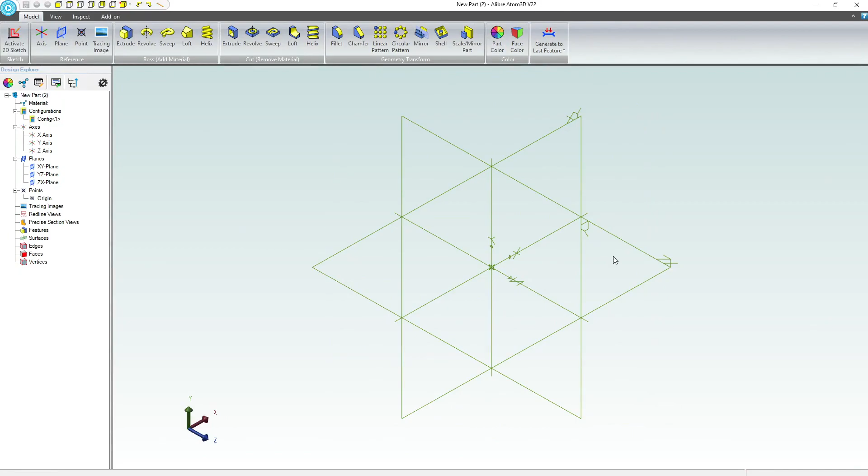We're going to go to a new part. And jumping in here, let's start on our top view plane. That would be our ZX plane here. And in our 2D sketch, I'll grab a circle. Let's do another circle, and another circle that I placed right on top of there. I'll right-click here and say Convert to Reference, and then we'll add in a diameter dimension. Let's go with, not 5 rather, but how about 6?

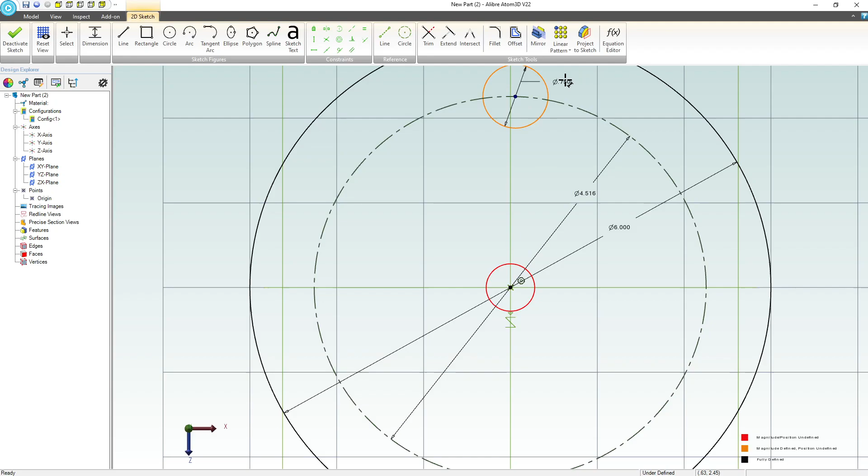And then we'll come across here and add in 114.7 millimeter, which I think is exactly, not quite 4.516. But I think that's a pretty common bolt circle diameter if I recall. We're going to say 0.75 here. Let's go with vertical relation, making sure that we're vertical. And we're fully defined there. I think I've got one more dimension to go. I think I'm auto-saving here. There we go. So let's go with 2.

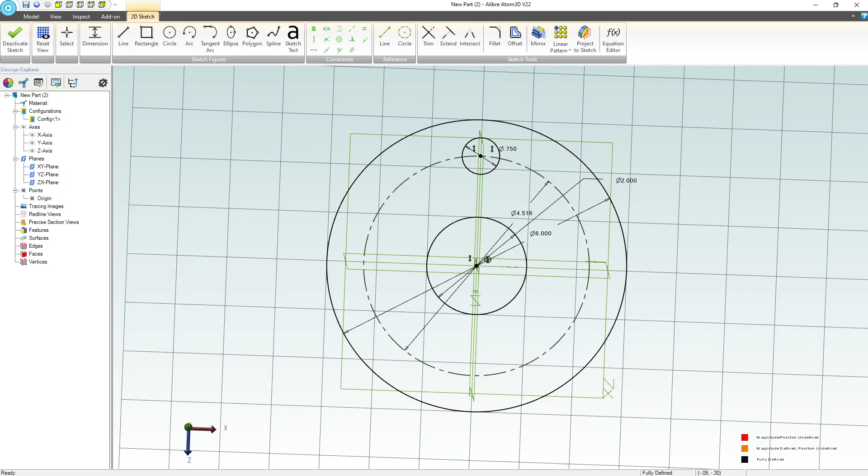Now, are we good here? I think we're looking about right. Next, we'll deactivate and extrude. We're going to go to 0.5. And you know what? There's one thing I did forget, actually. I need to actually propagate or pattern these holes, right? So we're going to do a circular pattern here. 5 instances. Our center will be here. And we want to choose an instance pattern.

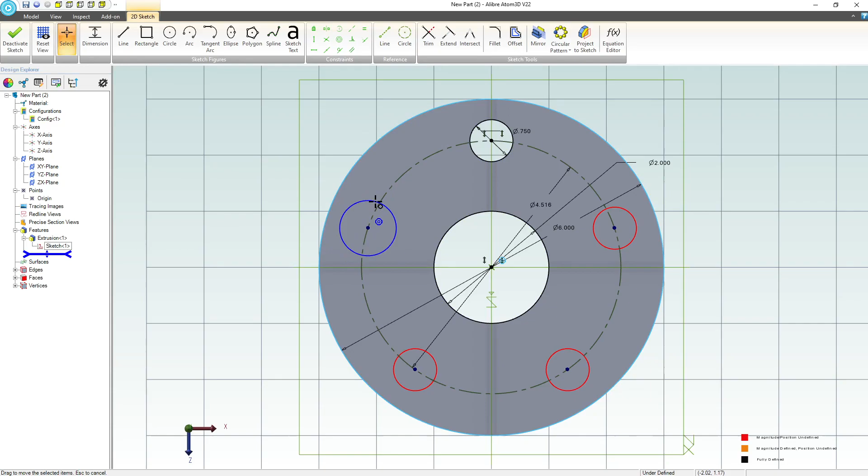Now that did not actually make sure that our holes were equal, so I'm going to make sure that we are equal all the way around, and then we'll deactivate. And that spreads our holes across the face.

Sorry if you hear my daughter in the background. She is being taken care of.

Now I want to sketch on this top face, so we're going to activate a 2D sketch. I'll go with a center point arc. We'll add in a horizontal between this point and this point. We'll add an equal to the outside of my curve here. And we'll add a dimension. There we go. From point to point at 2.75.

I want to add a series of tangent arcs in, so we'll add in a tangent arc here. We'll add a tangent arc over here, and one final one that should end with a vertical constraint to its center point and end point, and another vertical from its end point to the origin. I'll add some dimensions in. Let's dimension that end point relative to the origin to something like 1.1 inches.

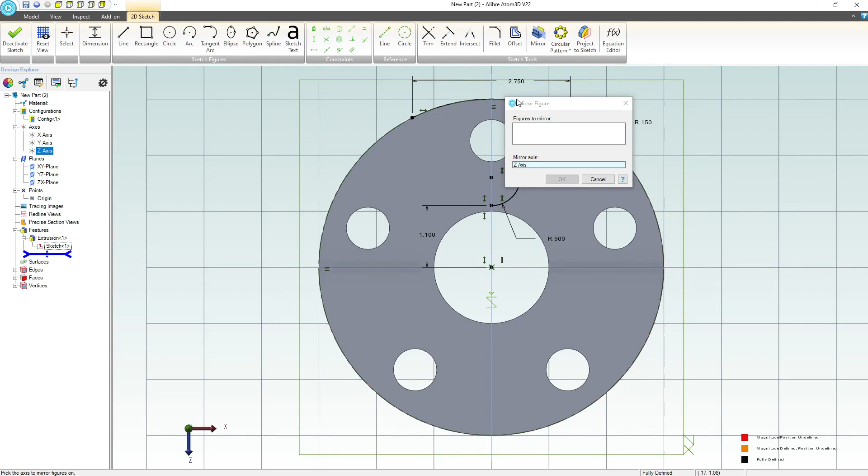We'll give this a radius of 0.5. We'll give this a dimension of 0.75. We'll give this a dimension of, say, 0.15. And we've got a fully constrained sketch that we can mirror. I'll choose my mirror axis to be our vertical sketch axis here. And then 3 arcs to mirror, and we're fully defined. So we'll deactivate that sketch.

Next, how about we make some planes that we can use for lofting. Perhaps my first plane will be offset from the XY, right? We're going to add in a plane, and we're going to say negative 3.4. And then I can add another plane in, and let's say that we want to make a 20-inch outer diameter wheel, right? That's going to be a very large wheel. So maybe we'll make that negative 20 and apply that. There we go. So we'll close that.

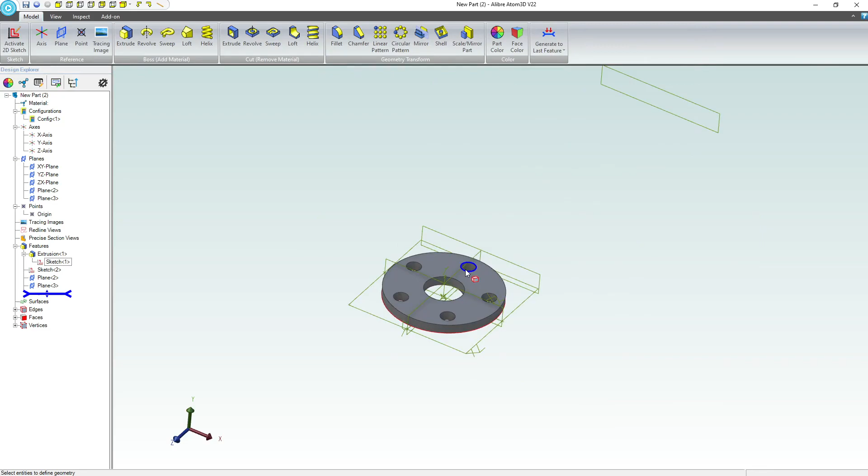Now I'm already seeing one potential problem, and that is I'm going to be lofting through my hole. So maybe we can address that. We'll edit my extrusion sketch. I wasn't planning on lofting through my hole, but I'm going to leave this in because I've had so many comments that this helps. So first off, we want to restructure our little hole pattern here to make sure that we can turn our hole pattern.

Now as I highlight a vertical, I can see that my origin lights blue, so I know that this point is vertical with this point. That's what that's telling me when I hover over it. So I'll select my relation and delete it. I'm going to do the same here, and now I should be able to move my hole.

So I'll do that. I'm going to make a line as a reference that goes through the center, and I'll draw another reference line here, right? And then I want to be able to move all these down. Now this is kind of a mess because I have all of these holes that were once part of a pattern and now are not. So I'm just going to delete all of these.

We're going to make a dimension that goes from there to there at 72 degrees, right? That's a fifth of the way around, except I want to say 72 divided by 2. So we go kind of half of the way around. I'll do a circular pattern now. We'll choose our center to be here. I'll choose an instance pattern with a 5. We're going to say OK.

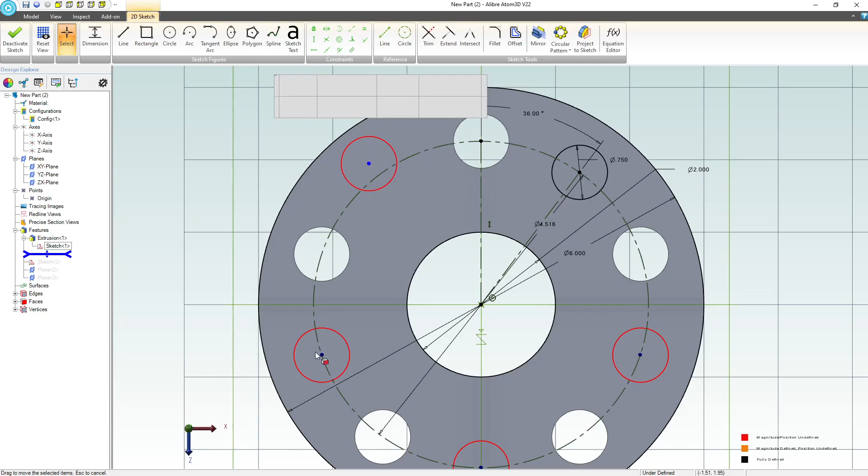And yep, this time it looks like we did not have constraints or relations copy into our pattern. I'll just re-add those, which should be real quick. All right, so we're going to re-add these. There we go.

Now I don't think for our design intent we need to add more than 2 construction lines, because I can make sure that we are horizontal here, horizontal here. Whoop, that did not go the way that I wanted. So we'll simply re-add our horizontal relation. There we go. I also will make sure that we are vertical there. Now,

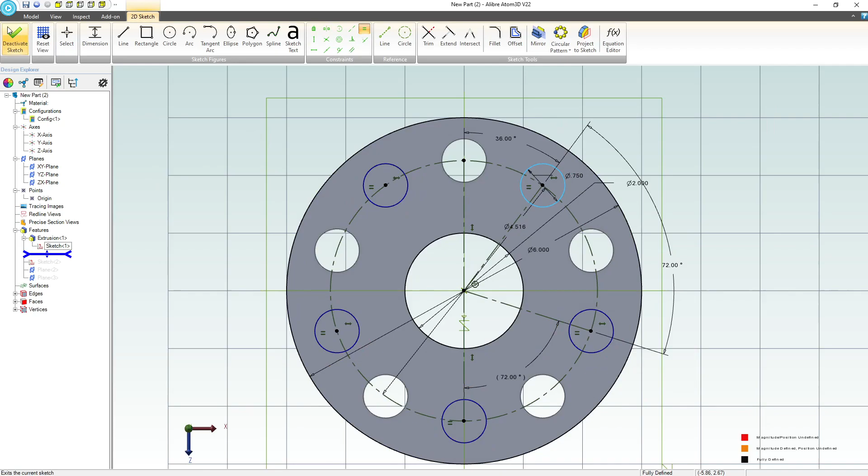we'll go with a dimension from here to here at 70, not 75, but 72. The same thing here. Oh, looks like we already have that. I think we just need to add an equal between all of these, right? So we're going to say equal, equal, equal, equal, and equal. And we're back in business. So if I generate to my last feature, our sketch does not have any problems.

Next, let's choose this next sketch profile to loft on, right? So we choose our plane here. I would like to add a line. Now it's very important to have the same number of sketch figures as we go. I'm going to add a symmetric from here to here. There we go. So now our line is nice and symmetric. We'll go with a coincident from here to here. Tangent arc.

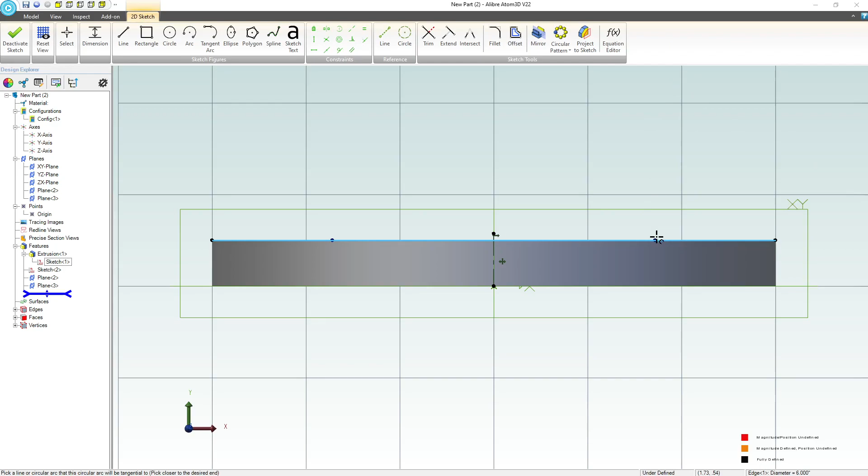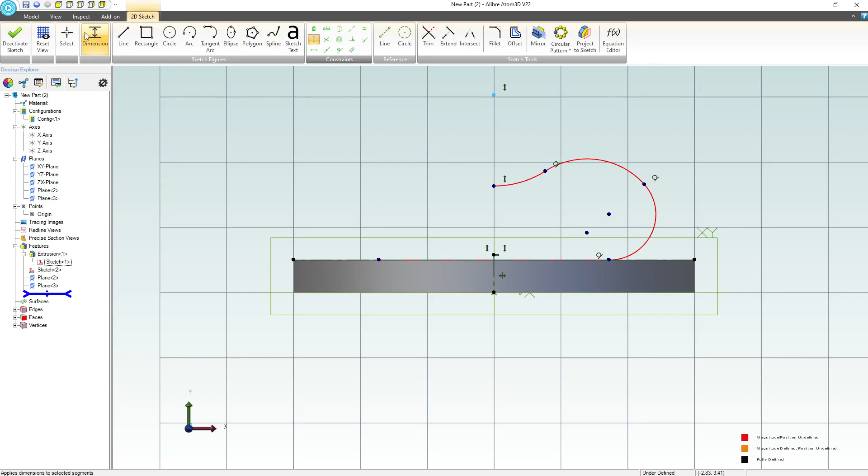So anyway, as I do the sketch profile, I want to make sure that I use the same number of elements from one profile to the next. And that will make sure that I have a clean, rebuildable, nice loft. We're going to go with vertical from there to there to there. We're going to take this arc and say 0.65.

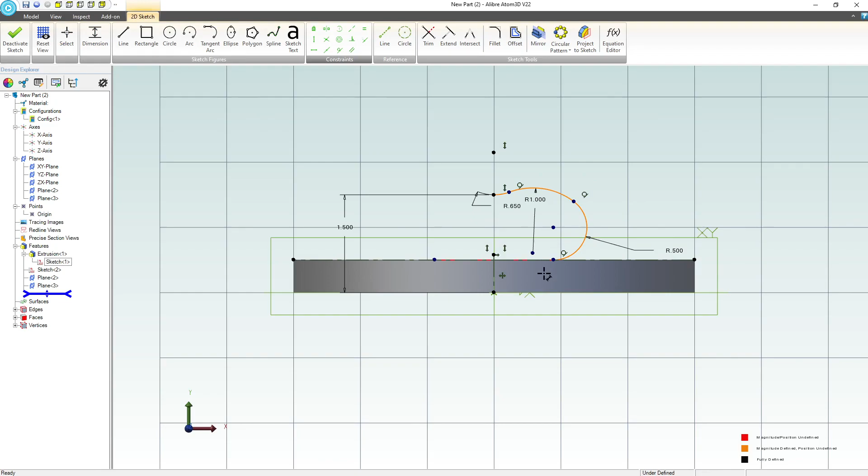We're going to give this a radius of 1, give this a radius of 0.5, and maybe I can give this a height, let's say from the origin, of 1.5, and I think we're almost there. I think we've only got one way in which we are not constrained. So we'll go from here maybe to the origin, 0.9. Okay, fully constrained. We'll do a mirror. We'll mirror these arcs about this nice center line here. We have a fully constrained profile, right?

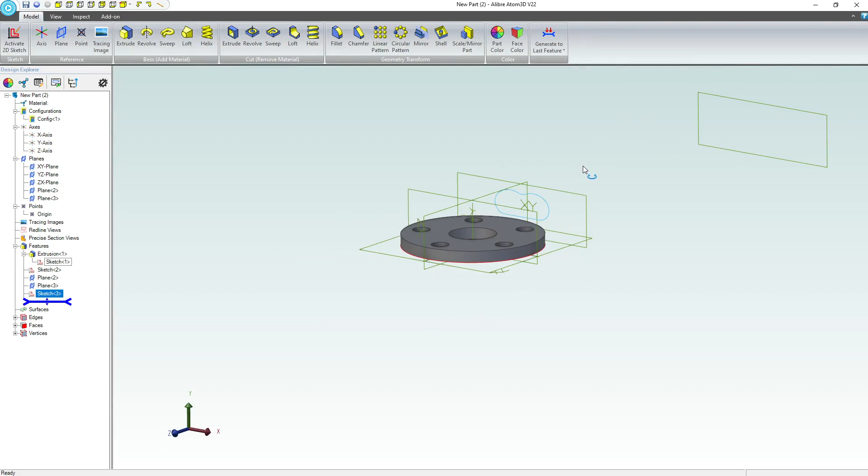Let's choose the next plane that we're working on. I'm going to activate a sketch. Let's do the exact same principle. I'll choose a symmetric constraint, and I care about that vertical axis with these 2 points to make us nice and symmetric. I think I'll grab my origin and this point here, and we're going to say a height of 3. Now let's do a width there of something like 3.5.

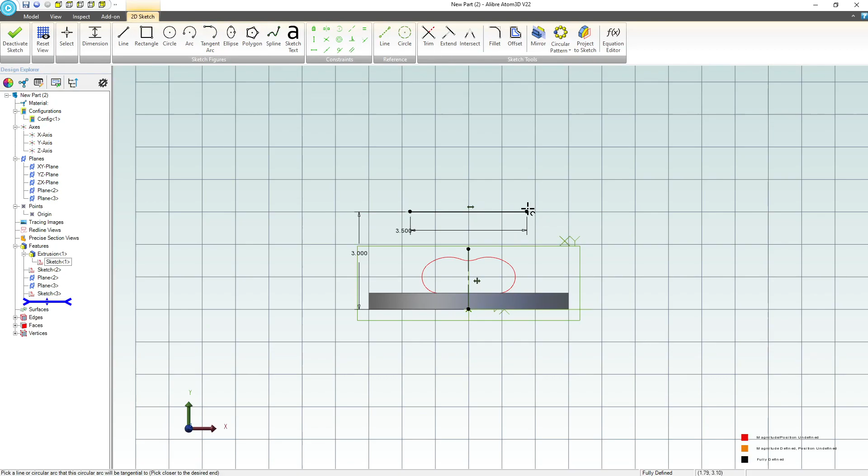Let's do a tangent arc coming around here. There we go. We'll go with a vertical there. Let's say 1.2, 1.75, 1.5. Well, actually, we'll go maybe from there to there vertically, 1.5.

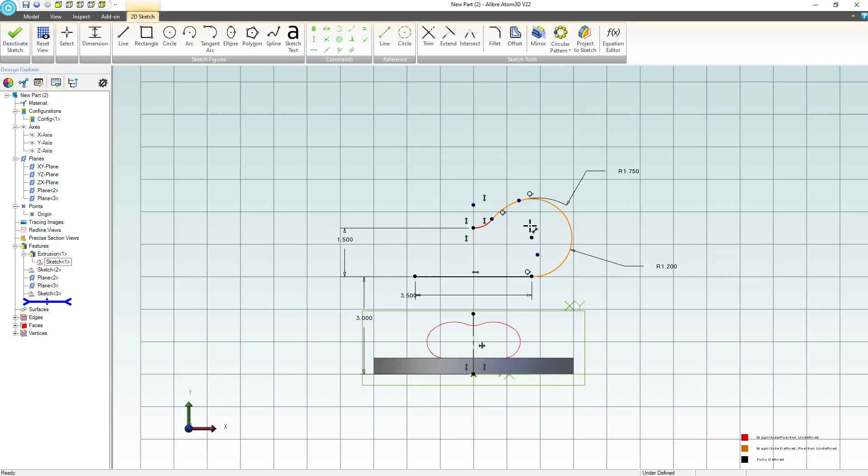Unable to determine a solution. My goodness. We'll go vertical there. And our height is unconstrained. So 1.5 worked that time. Now we've already dimensioned this guy at 1.75. But we are missing something.

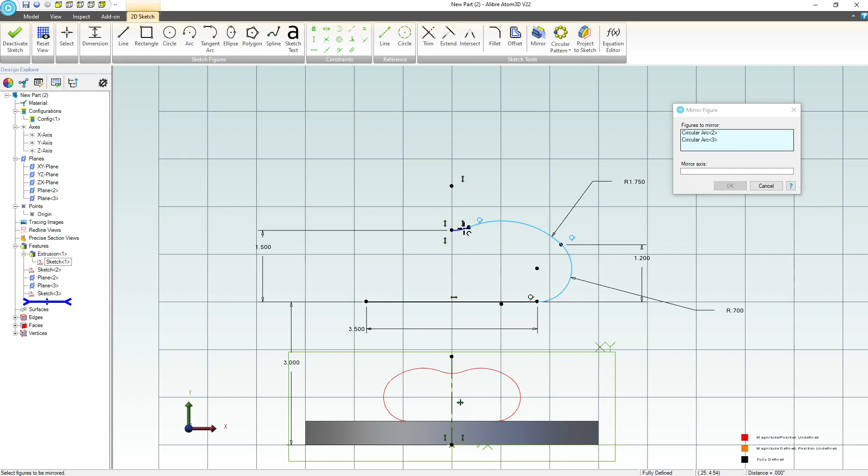I'll just reduce this to 0.7, and we'll give this a vertical height of 1.2, I meant to say, not 1.52. And we're fully constrained. We'll do a mirror. Again, we're using the same number of sketch elements as before on purpose. We're fully defined, so we'll deactivate the sketch.

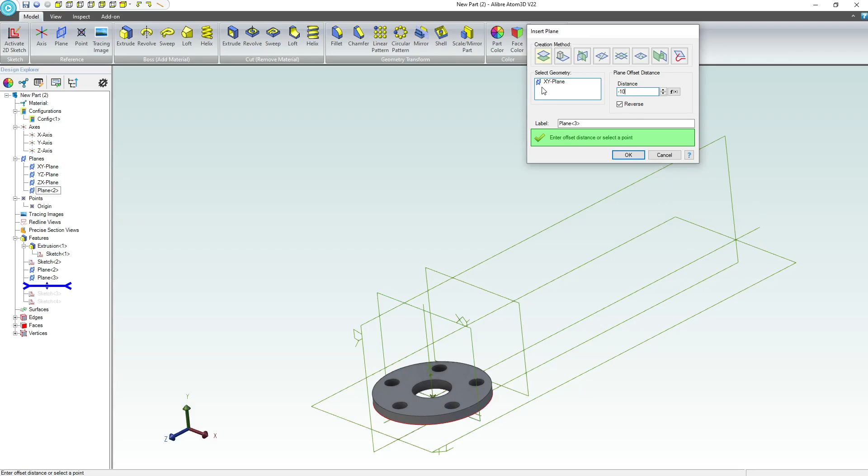So we want, in fact, let's edit the definition of this plane here. -20, I said we want to do a 20-inch wheel. That would make us want to have a -10-inch offset so that we have a diameter of 20. That looks a lot more reasonable. So we'll generate to last feature here.

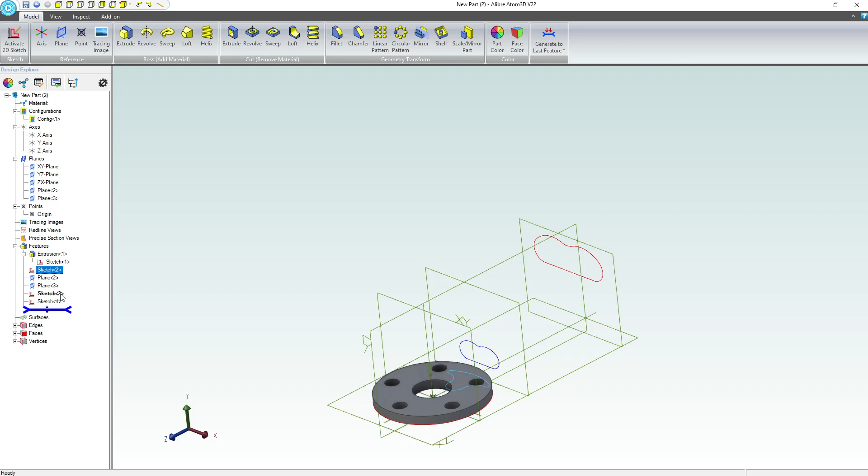We want to go from 2 to 3 to 4, right? So I'll highlight 2, 3, and 4. In fact, I need to hold Control instead of Shift. 2, 3, and 4 in my tree. We'll do a loft, and let's see how that looks with minimize twist and minimize curvature on. There we have it. I like that a lot.

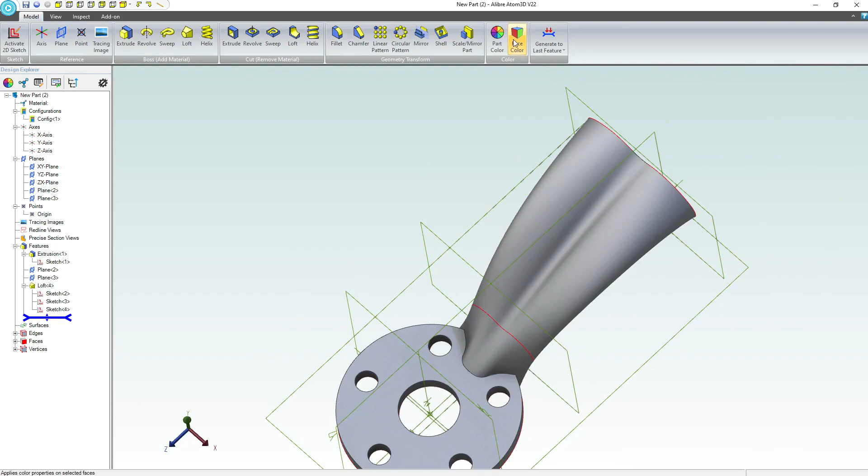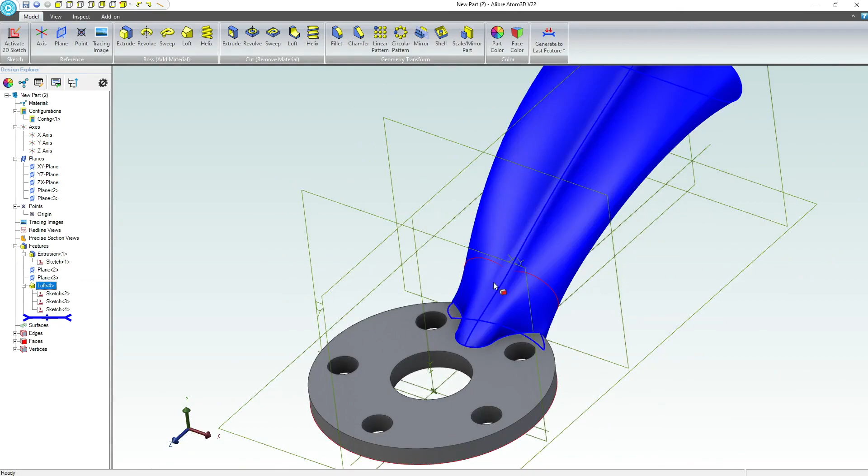I would like this face to go a little bit further or deeper in. So to do that, let's specify a tangent on our sketch profile 2. Let's do that to a magnitude of 2. And yeah, that's a little bit different. If I go back to edit and unminimize my curvature, I like that, right? So we'll unminimize our curvature. That gives us a really nice complex looking face there. But again, this is kind of personal preference as to what you want your wheel to look like.

I'll pattern my loft, do an instance pattern to a number of 5 with our center around this face. Bam. And there we have it. Our YZ plane will activate a sketch. Now I can sketch out a profile there to there to there to there, and I can start adding some dimensions.

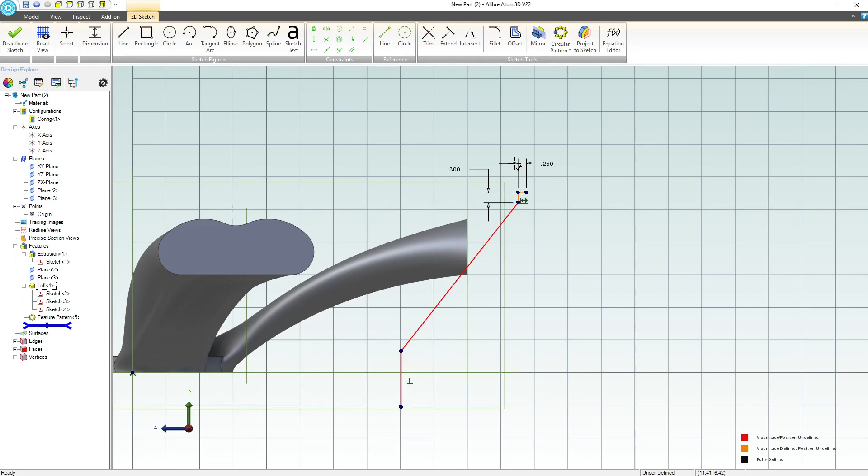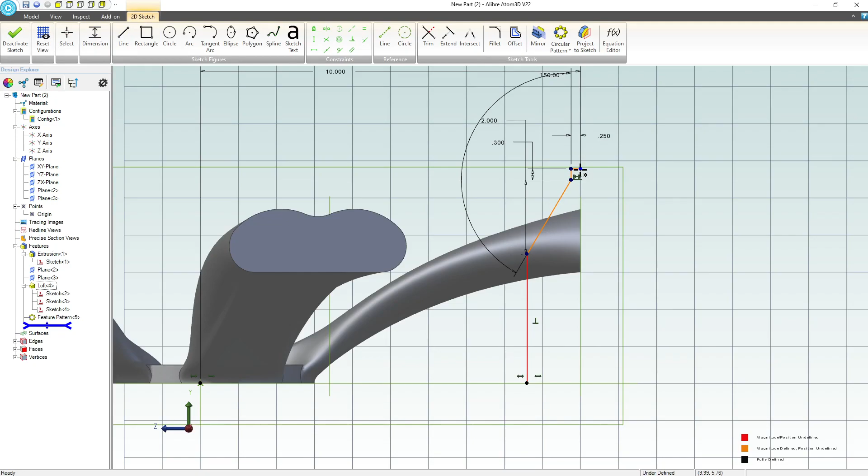I know I want this to be something like 0.3. We'll make this something like 0.25. We'll give this 10. We'll add an angle here of, say, 150. Maybe I can give this diagonal line a vertical dimension of 2 inches. We can add a horizontal to there. And now we ask, where are we not defined? Looks like I'll add in a vertical dimension from the origin of 5, right? We're going to make this 0 offset for simplicity.

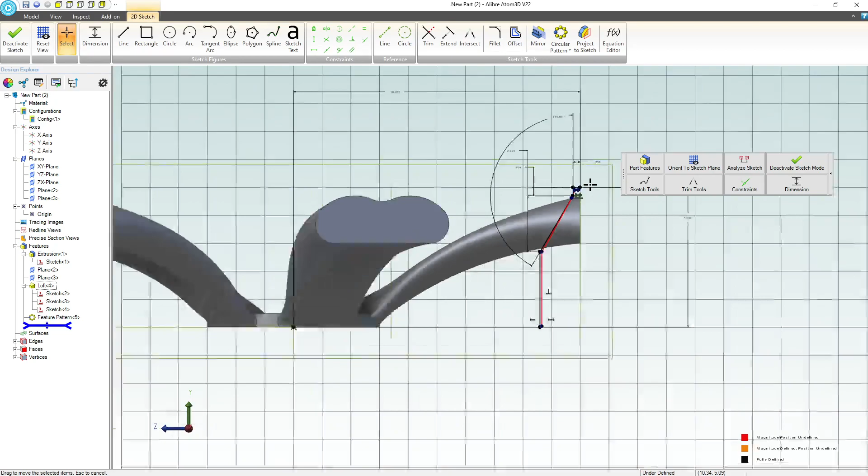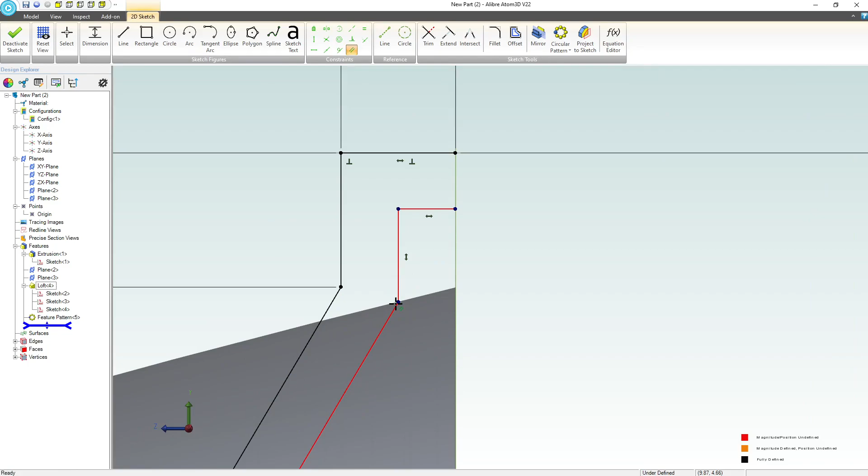There's a few ways. I can just sketch out kind of an offset profile, or I can highlight everything and choose offset with a flipped direction. And then I constrain, of course, everything that I was going to do. I did not mean to do that, so I'll hit Control Z. We'll add horizontal. We'll add a vertical. And then we'll add a parallel. Yeah, we'll have to deal with that too. I want to make sure that we're vertical here.

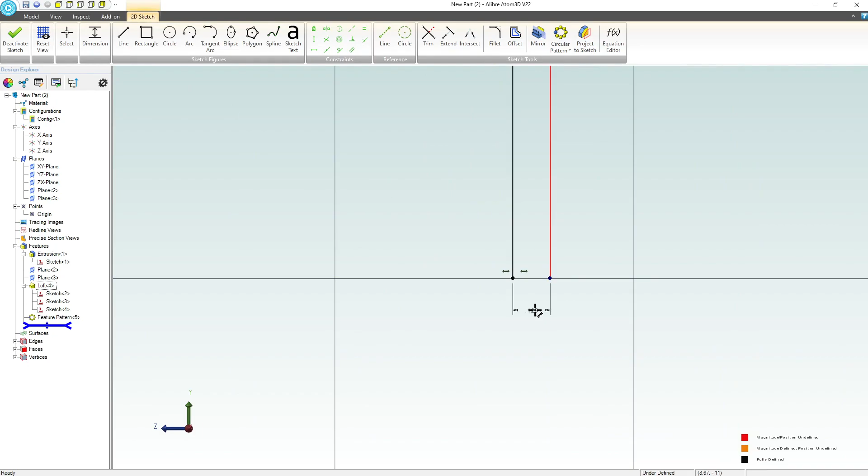Very good. For simplicity, you don't have to dimension the width between these two lines. You can constrain it in other ways if you're worried about over-dimensioning. I'd like to get through this a bit quicker, so I'm giving that a 0.125. 0.125, right? I'm being very simple about this. I don't want to do that, but make that vertical. 0.125, right? 0.125.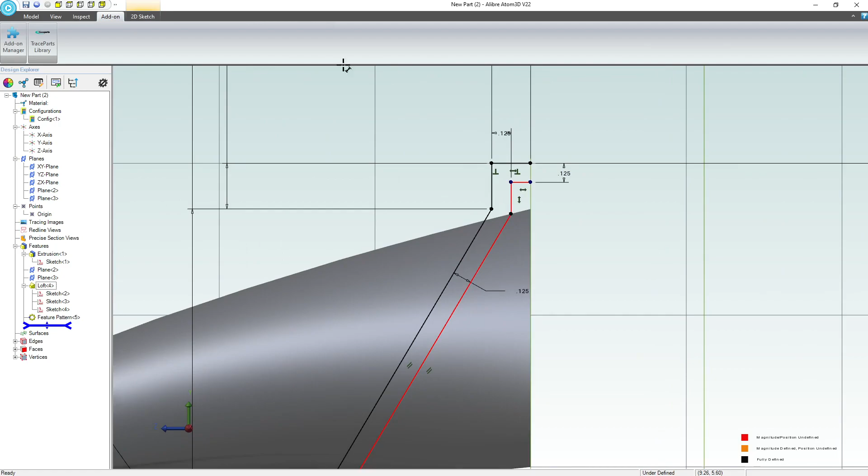We'll go back to 2D Sketch and add a line that can close that profile off. And now we ask, where is this not constrained? It should be down here. Yeah, there we go. For simplicity, make that horizontal. Looks like we got to be horizontal down here. And we're fully defined, right? So

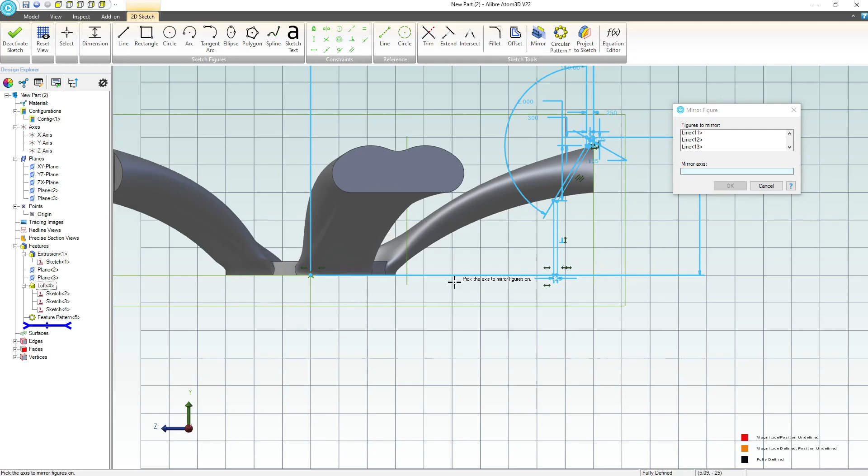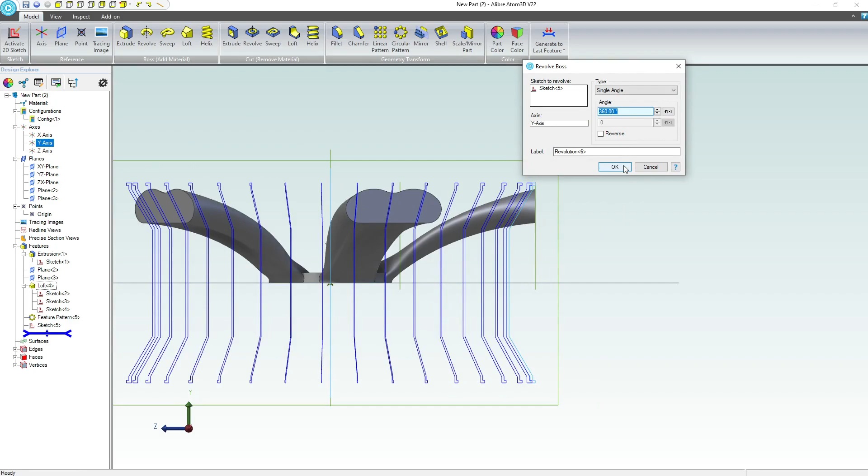I'll select everything. We'll do a mirror. Our axis will mirror across there. Come on, mirror axis. There we go. And we've fully defined everything. Deactivate our sketch. And let's now do a nice revolve. There's our wheel profile. Now wheels, I don't think, are actually symmetric, but I'm making this symmetric for simplicity.

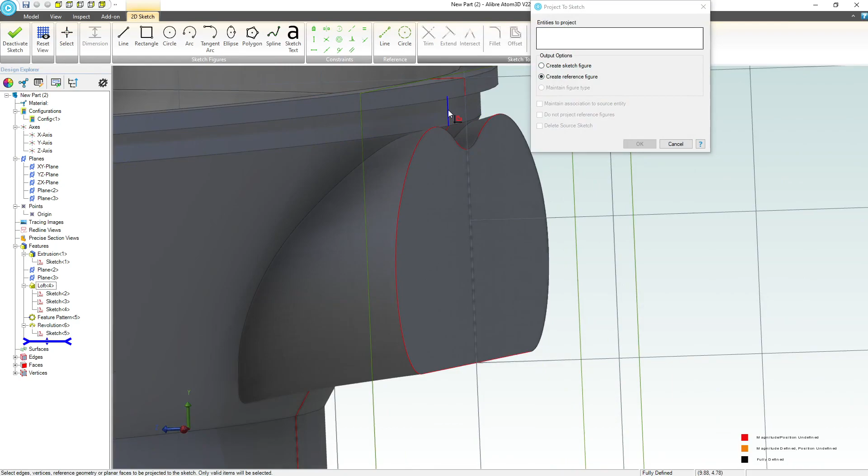Next, let's do another sketch on this plane. We're going to activate our sketch here. We'll project a reference figure with maintained association. And I'm going to choose these lines. Looks like that line didn't want to select, so maybe it'll want to select down here. There we go. I think that's actually all I need. I'll reset my view.

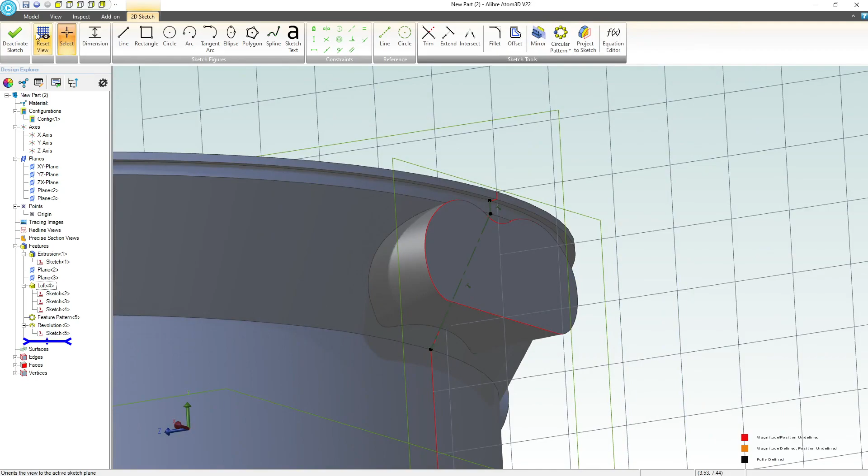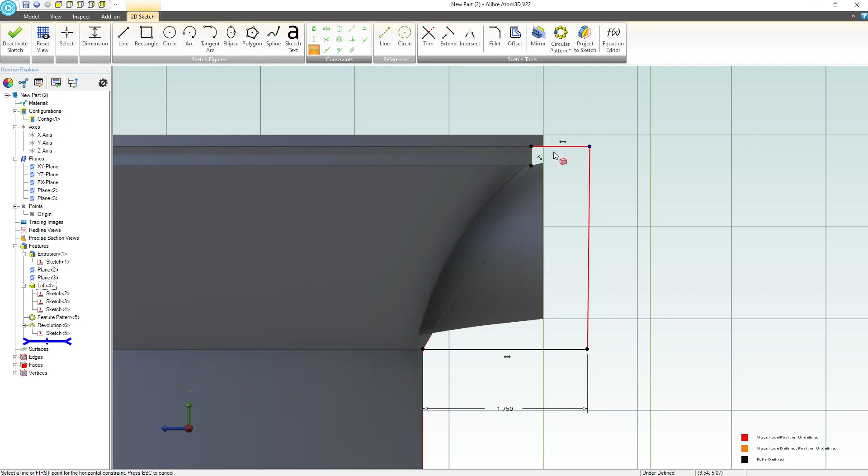There, and there. We're going to go with horizontal, and we're going to say dimension to 1.75. Add a vertical. I meant vertical. There we go. And deactivate. My sketch is not closed.

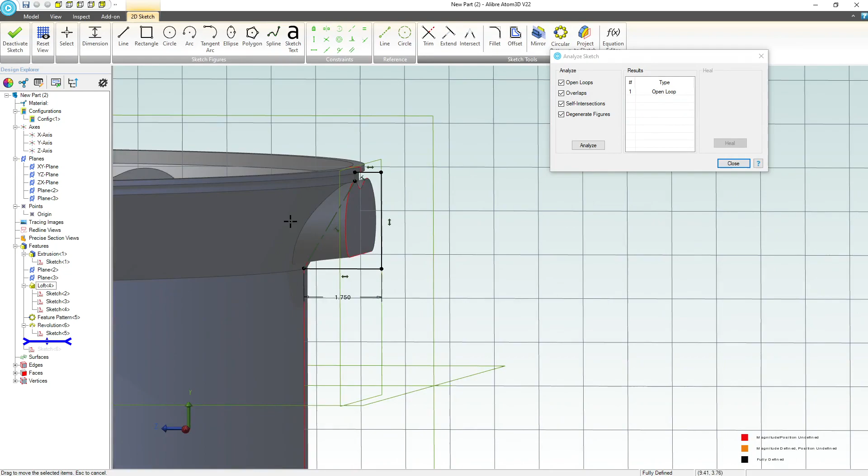So it looks like this thing came in as a... we'll convert to regular figures, and yeah, I guess I made those reference. I want regular. Okay, we'll deactivate that. We'll do a revolved cut around our center axis. I could probably just highlight that face and pull the axis off of that. So now our spokes do not protrude out to the outside of the wheel.

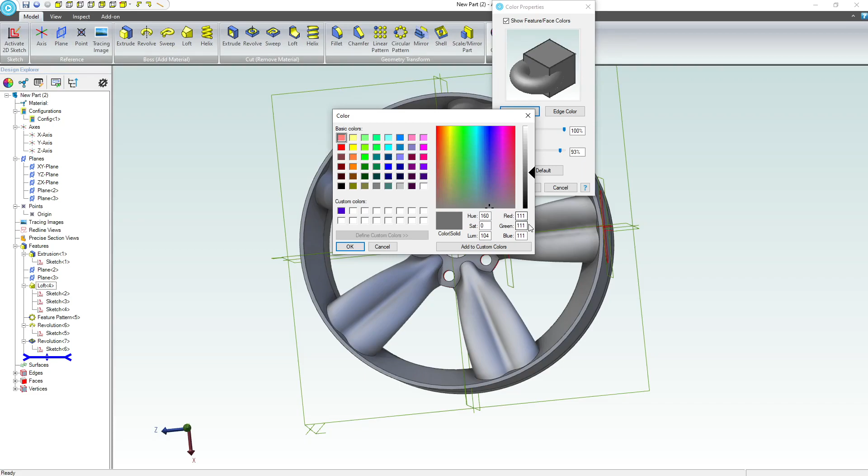If you're wondering about my part color, that was kind of fun. I set this to be 93% reflective, and I set my color to be 160, 0, 104, and 111 for everything. And that's what generates this color. It kind of reminds me of the graphics in Fusion 360. I really like what Alibre is doing with the graphics here. I think it has a very rich appearance.

Now let's add some chamfers. I know most people call them chamfers, but I had this professor in school that called them chamfer, and from then on, it just stuck with me. I'm going to chamfer each one of these holes, 0.125 there. We're also going to add one there. How about 0.225 on that one?

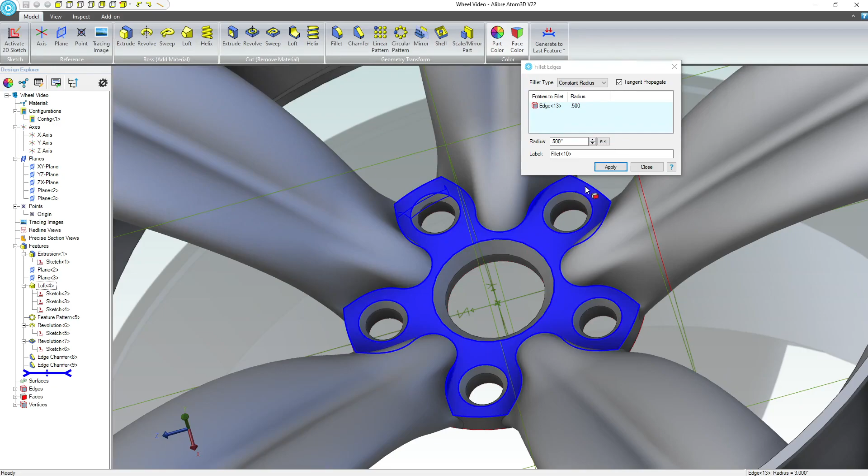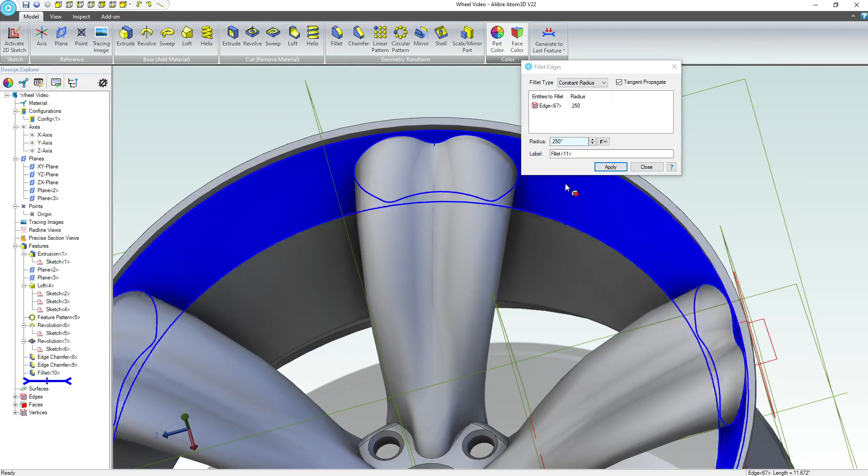Okay, I think we're probably ready for fillets, right? We really want to smooth this out because a nice fillet will smooth out a bunch of the stresses that will incur around here. Now let's grab a fillet. And actually, you know what? Before I fillet there, how about we fillet around this face? And I'm going to take that down to something like 0.25. All right, now let's add another fillet that I can apply to this edge. So you can see we've rounded out the entire edge down there.

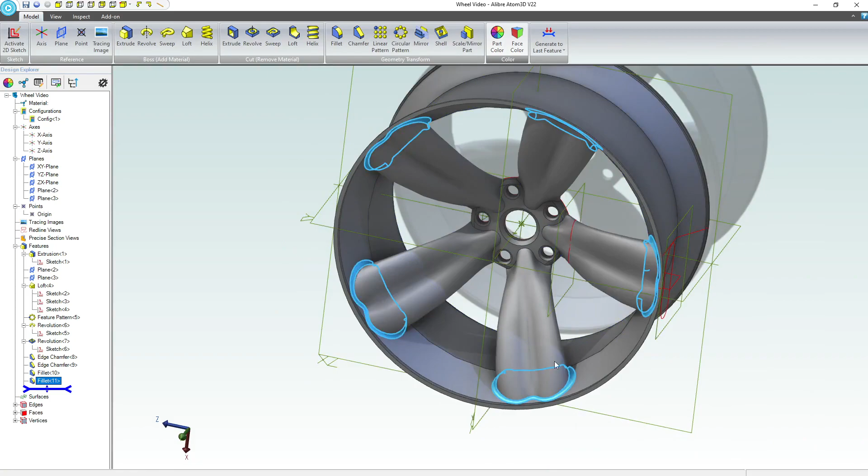And I'm going to see if I can do that all at once, if Alibre will let me. I'll select each of these. There we have it. So our fillets are applied all around there. That really does help with stresses. Next, I'll add a fillet. How about 0.225? Or even 0.245.

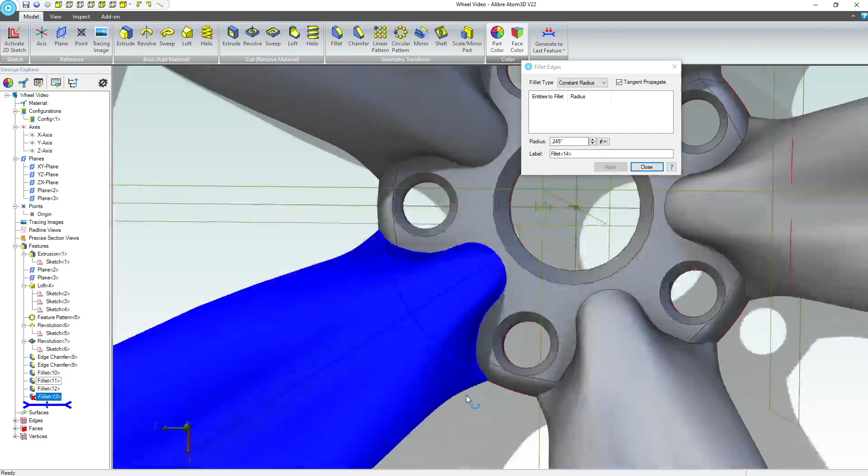And because we've got a 0.25 fillet down here, going a 0.25 around 0.25, it might be a little bit easier to go just a hair smaller, right? So we're going to apply that. We're going to select here and apply that. And notice we broke. That's kind of a problem. So it worked here and it did not work on this edge. I believe it will probably work over here. I think we've probably got one stubborn fillet that will not work on one instance of a pattern. That's quite odd to me. I'm not sure why we broke there.

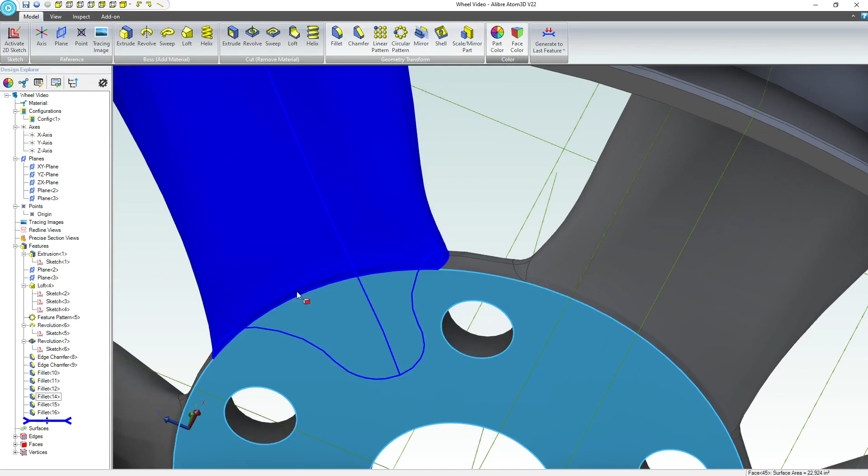Let's close that. I'm going to get rid of my fillet down here. It could be a face blending issue. So, in fact, why don't I just read the error message? So I try to put the fillet there, it doesn't work, and it just gives me a broken fillet without giving me an error message. So how about I highlight this entire face, I'll add in a fillet, and we'll say something like 0.05, right? Just kind of a modest fillet around there, and that might change where our fillet ends.

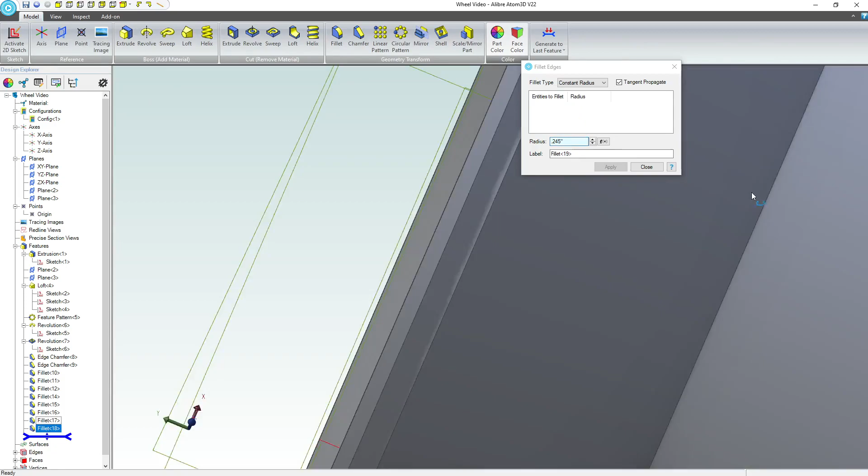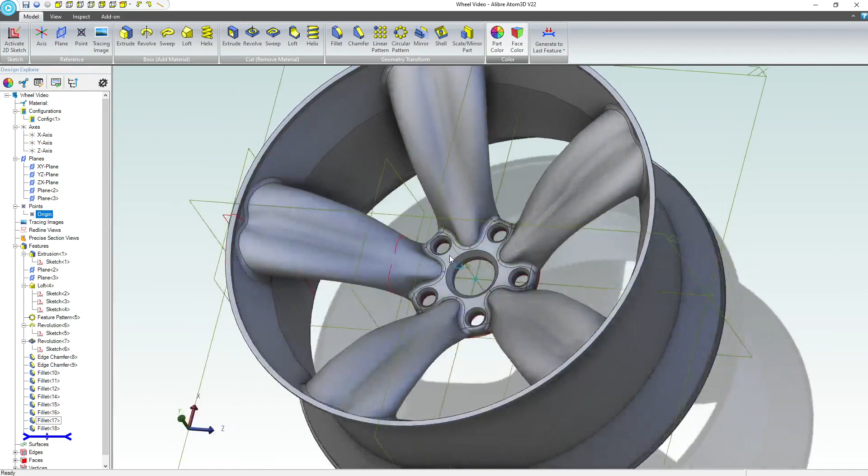I'll also attempt to click every line around this edge and go back to 0.245 and apply that. There we go. So I think there was probably a face blending issue on that back face, and just adding a fillet to where that fillet starts and ends, right? Possibly creating this little guy has cleared the error on that one particular face. Kind of odd that that happened that way, but you get that in every platform, so it doesn't really faze me too much in thinking that there's something with this platform in particular when getting errors like that.

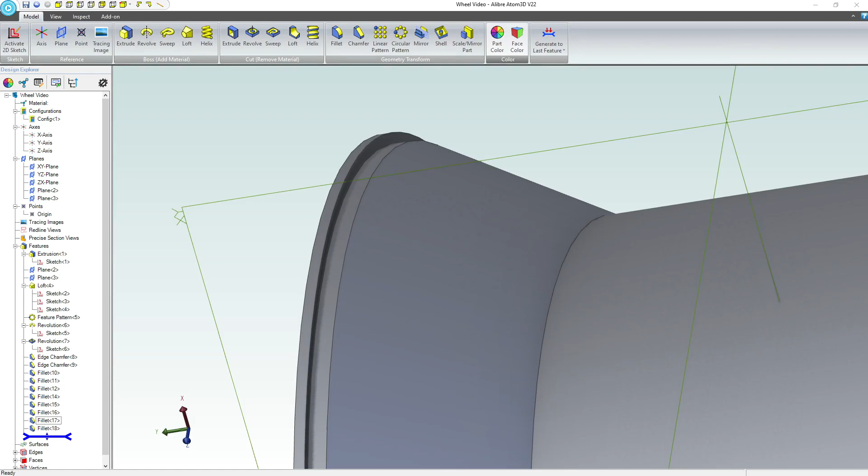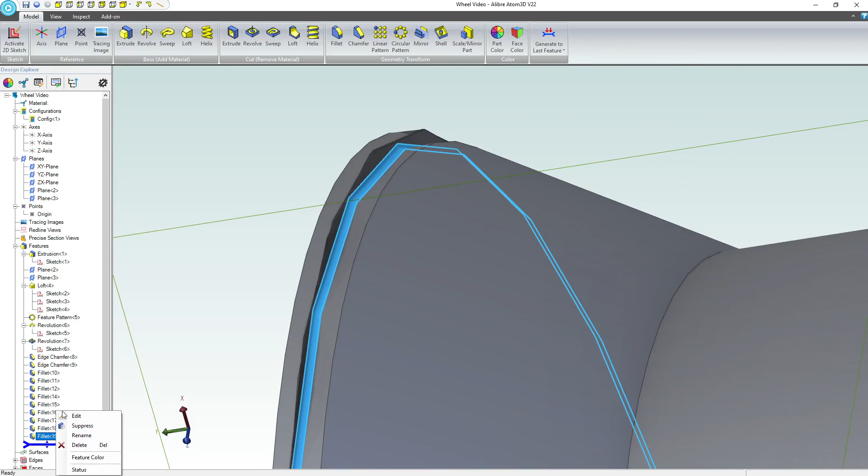Now I would like to add some more fillets right on the inside of that, and they're going to have to be pretty small. So let's choose this inner edge here. We'll choose a fillet 0.125. That might be quite large. It's very large. Edit 0.05, right? We've got to have that tire bead stick on something kind of vertical. So now that I know that that works, we'll edit, and I'll bring in my fillet right in here.

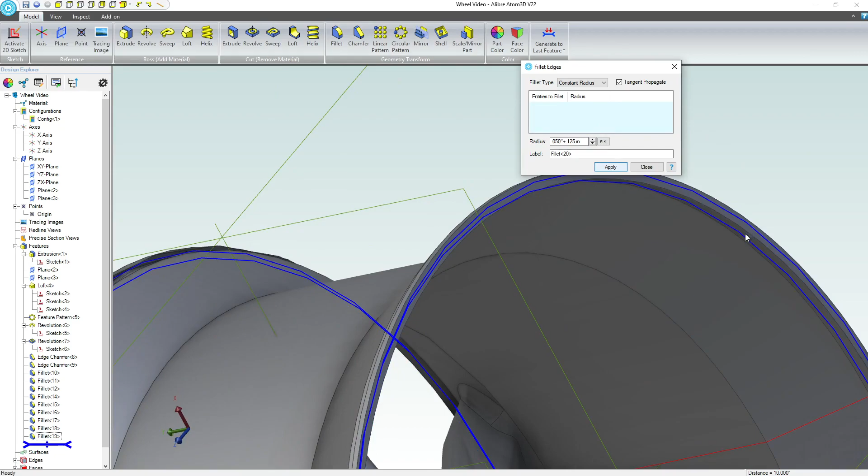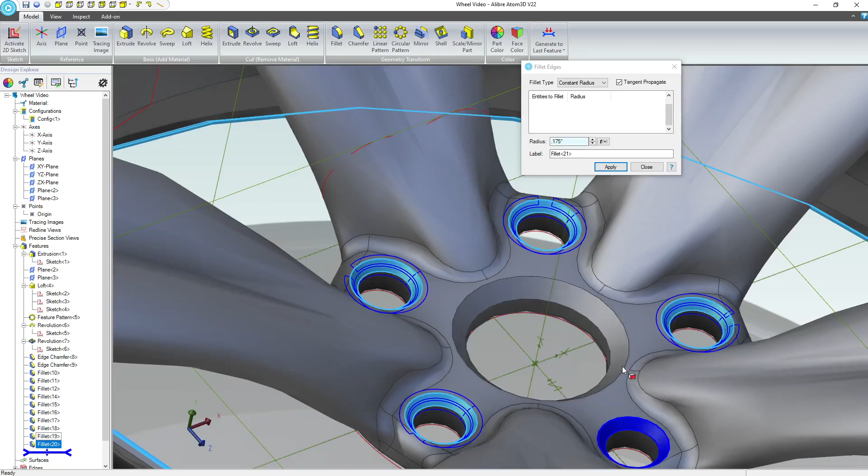Now we'll create another fillet on the outside. We're going to say plus our material thickness, right? Plus 0.125. And we'll go here and apply. So we should have a constant thickness between those two fillets. Maybe I'll add some. Now this probably doesn't make sense for manufacturing because it's wasteful and dumb, but 0.05. What if I highlighted this face and added fillets on here at 0.05, right? Real small, smooth fillets.

Now I probably want to smooth this out. Now it's kind of dodgy to have, you know, 3 edges meet all at the same spot. I don't think this will turn out well if I try to add fillets on these edges. Let's get rid of this face. All right, so if I try to add, yep, it won't let me select anything but the face. So if I try to add a fillet there, I guess it worked. It smooths out. It's kind of messy.

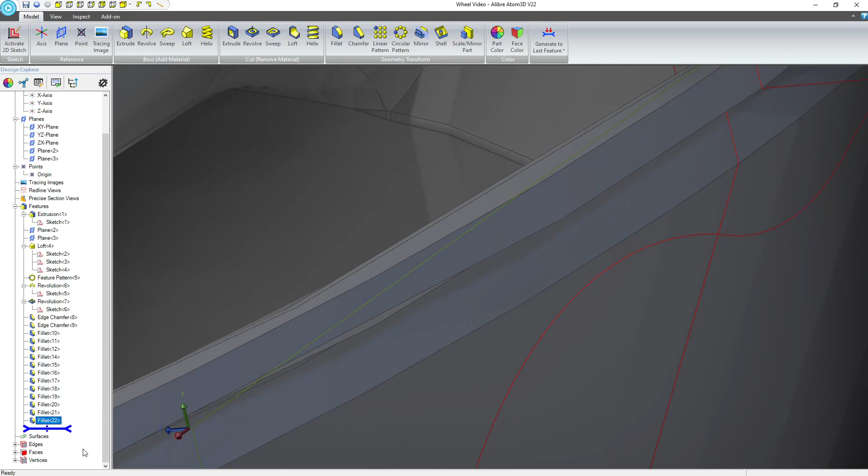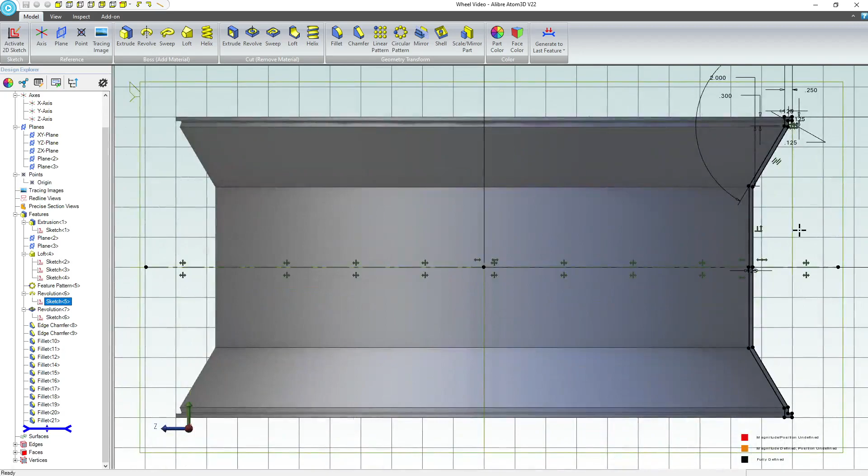So I'm going to get rid of that fillet. Let's try something different, right? I'm going to save this just in case I mess something up spectacularly, but Alibre has excellent topology optimization and topology naming. So I'll bet you I can go to my additive revolve. I bet I can choose a sketch fillet.

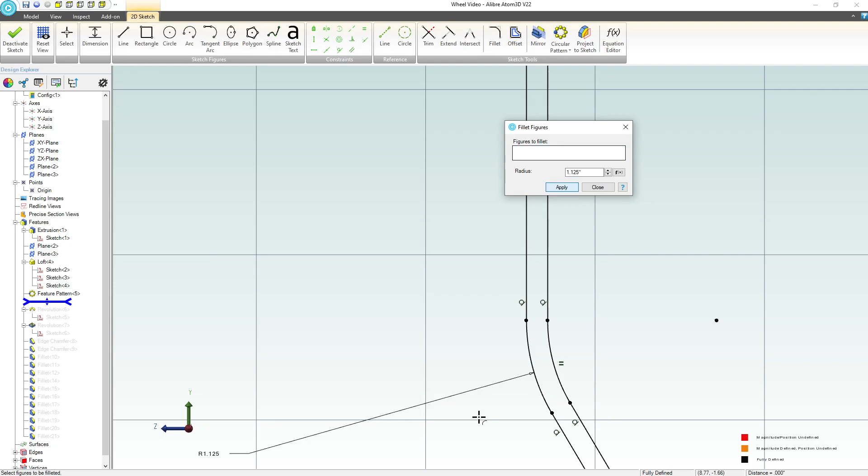We'll go here to here. We'll do something like a large 1-inch sketch fillet. It even kept the sketch fully defined, which I think is pretty cool. Then we're going to say 1.125, and we'll choose here and here. And here and here, so we've built in a fillet. We'll deactivate and generate to the last feature.

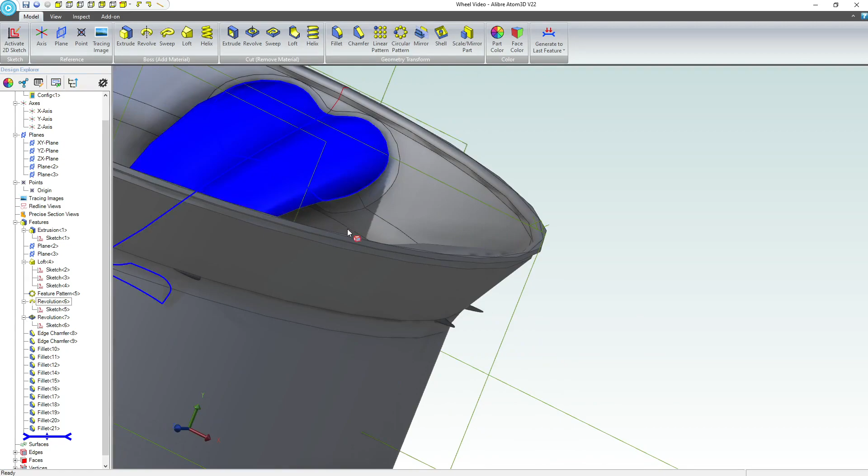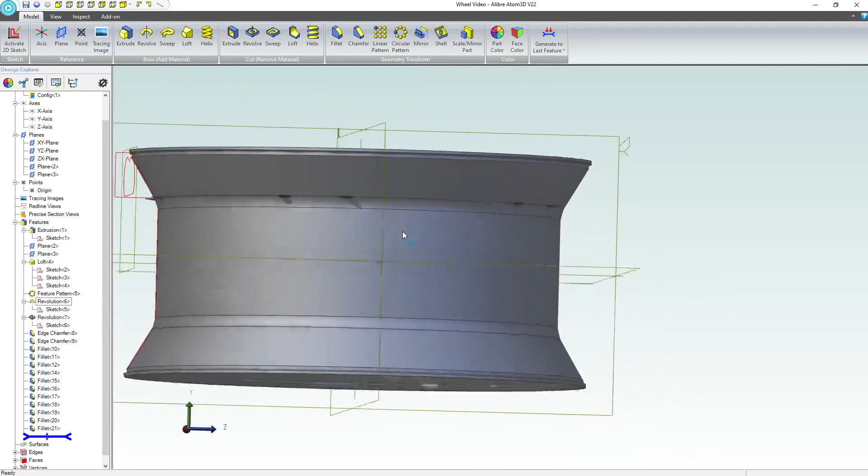Nothing broke, and we have our fillets going around smooth surfaces. So that is pretty cool that we can do an update upstream of so many features and not have it break. That's not always the case with any platform, but it's pretty cool that it worked here. We may want to add a valve stem. Oh, there is one little rebuild artifact here, right? And that comes with my circular revolve.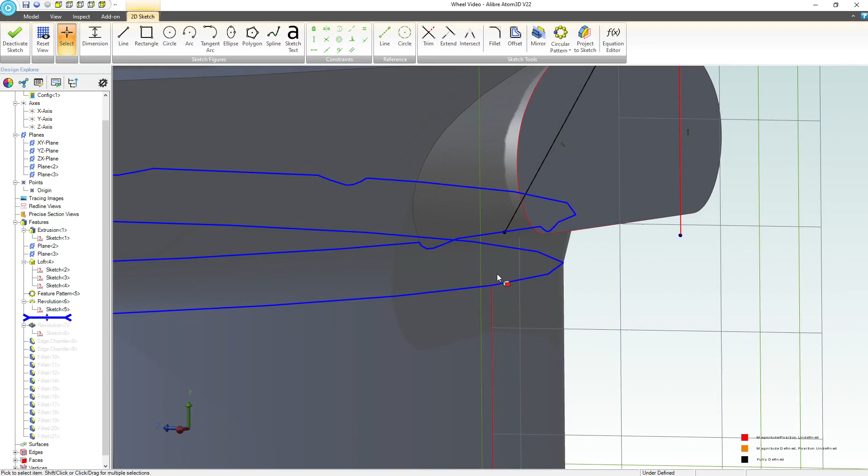I'm going to leave this in the edit because I think going over stuff like this has helped people in the past. I'm going to get rid of this line, right? We're going to delete that. And yeah, I'll reset my view. Let's do a tangent arc. We'll do a horizontal here and here.

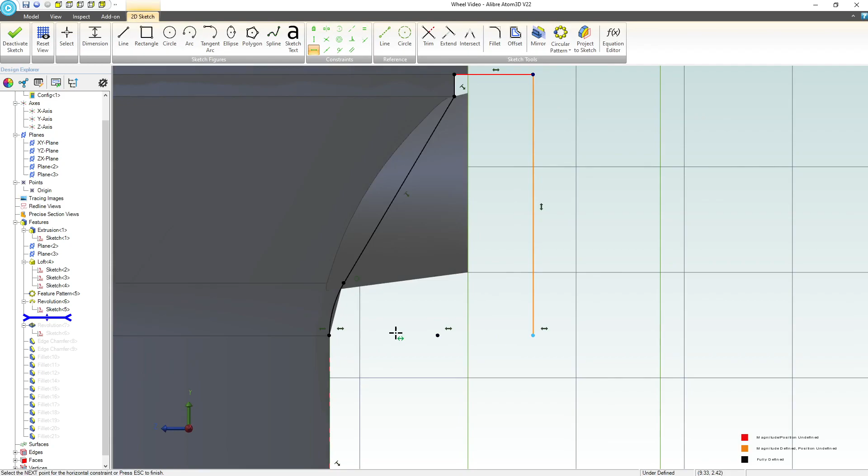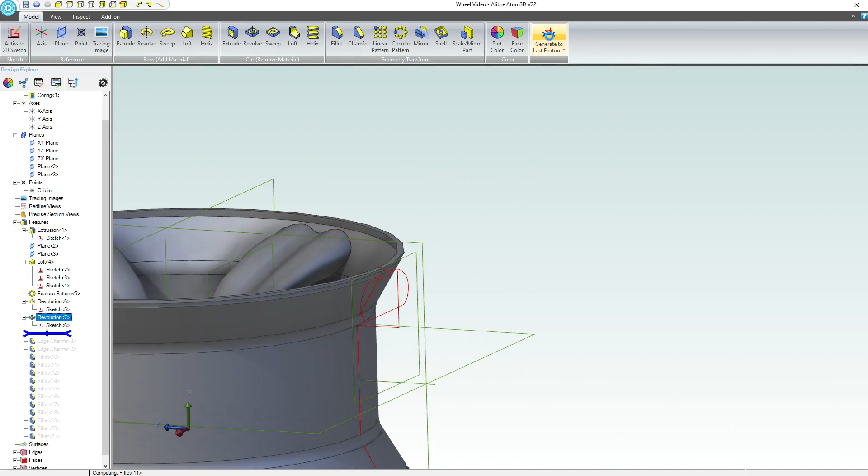And now the question, let's project a reference figure here with maintained association. There to there. Excellent. Now we'll go horizontal from here to here. And I can draw my line even better. That's what I wanted. 0.75, just an arbitrary dimension for that. And I think that fixed everything. We'll generate to last feature. I don't think that'll incur us any new errors. Nope, nothing broke.

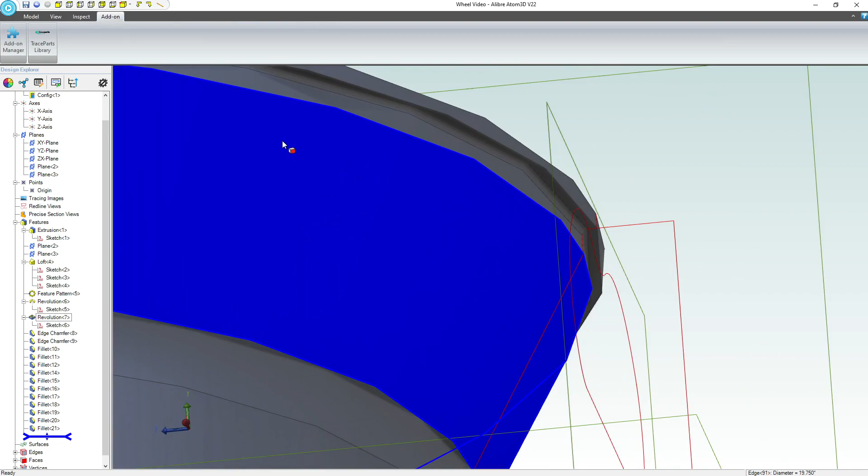All right, back to my comment on adding a valve stem. This really is kind of rough graphics, and I believe it's because I'm recording this as I'm doing this, and it's lowering my graphic performance because of the load on the processor of recording. But let's add some fillets in here. That'll help smooth it out a little bit.

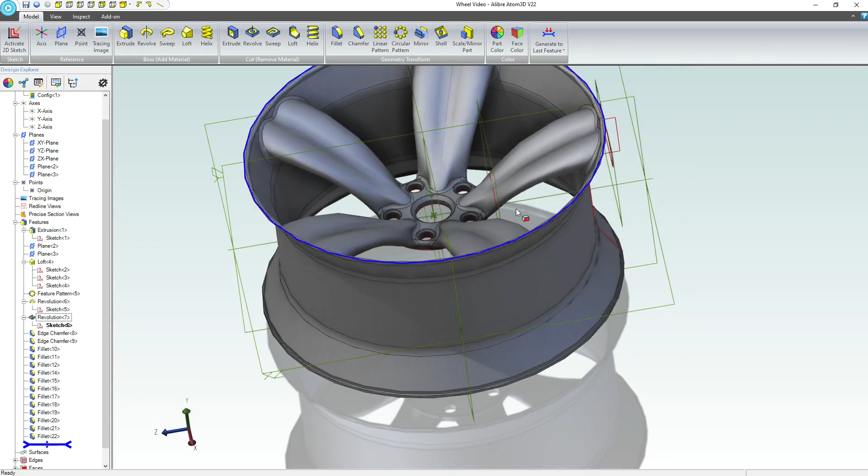Okay, so we'll close that. I don't think we have any sharp edges anywhere we don't want them. In fact, I think we have very few sharp edges altogether, which is pretty cool. That's very beneficial when working with, let's say, injection molding, to be able to smooth to the degree that we have. All right, so how are we going to tackle a valve stem?

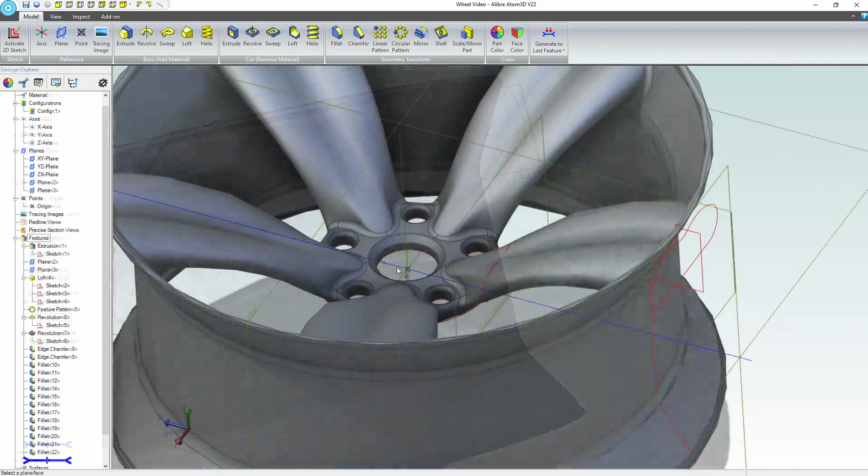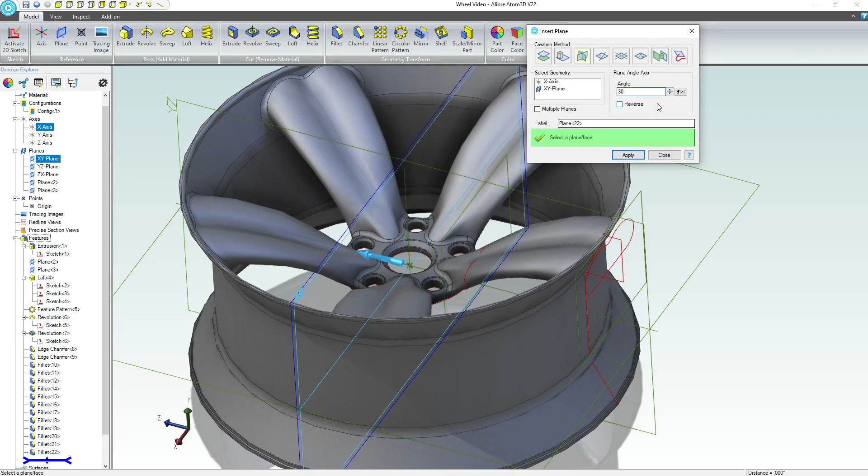I want to select this axis here. We're going to go with a plane. Now I know that this was offset at a 150-degree angle. So I'll select this plane and choose an angle of 30 degrees. You can see now that we're running parallel to our wall. So I'm going to apply that and create a 2D sketch on the plane that I've just created.

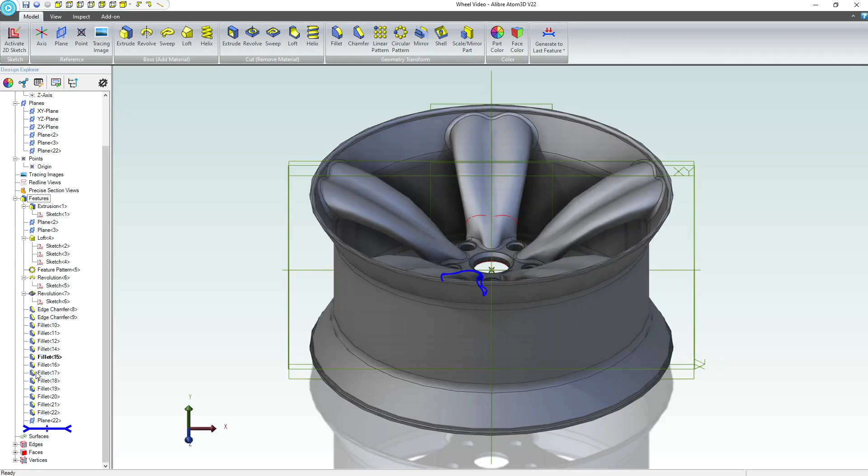I'll reset my view to look at the other end of this. And I'm going to put a circle. Oh, and I'm looking through a spoke right there. So I'll reset my view again. In fact, you know what I'm going to do? I'm going to deactivate to make sure that I don't drill through my spoke. And we're going to edit our plane and make it negative, or positive, I guess, positive 30 degrees.

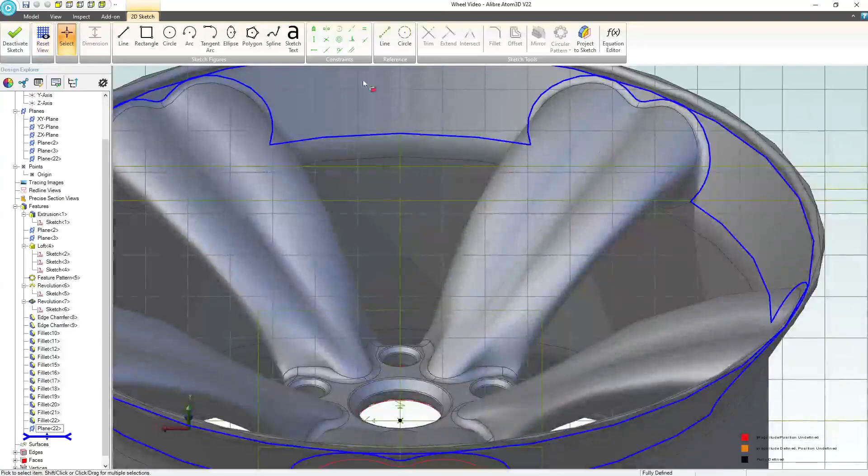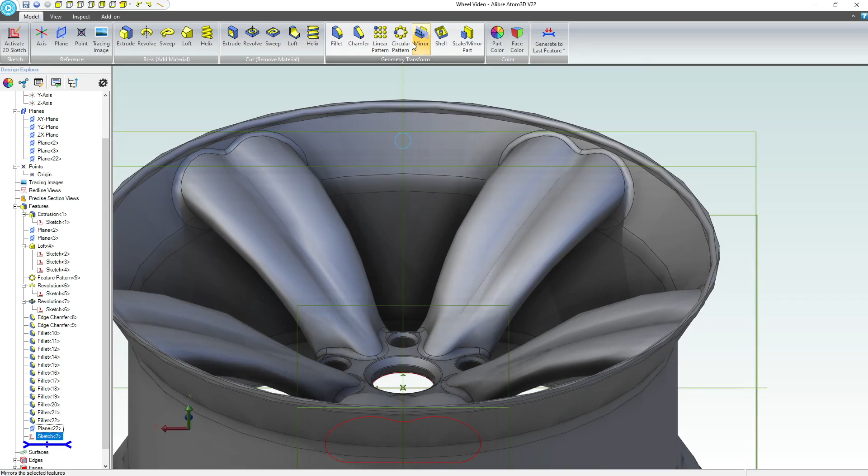And that way, when I go to sketch on my plane and I reset my view, I'm looking through a nice blank piece there. So I know I'm not going through any spokes there. We'll add a vertical constraint relative to our origin. We'll get this to be something like 8, and then whatever diameter we want our valve stem hole to be. 0.5 perhaps, I don't know. We'll deactivate and do an extrude cut through all.

So there's our gorgeous wheel.